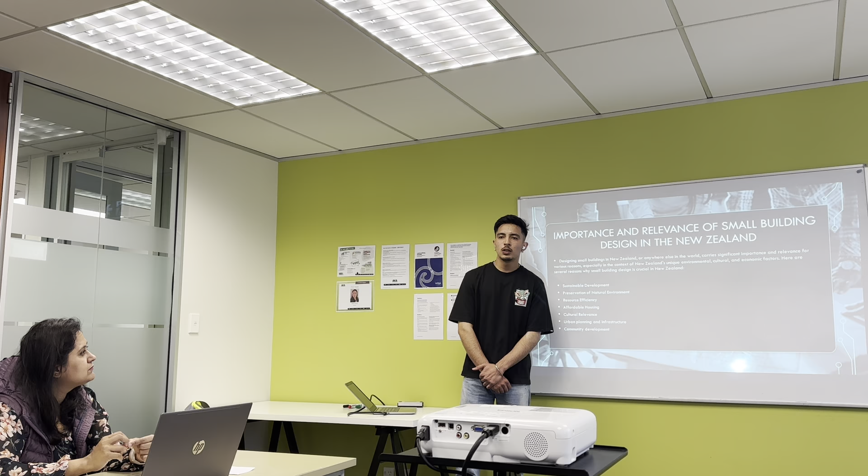Here are some important factors in small building design and why it's important in New Zealand, like sustainable development. Sustainable development is the process in which we don't compromise the needs of future generations, so we have to use resources very efficiently so future generations can also use the natural resources, and preservation of the natural environment. In New Zealand, timber is commonly used as a material for buildings since it is very common here.

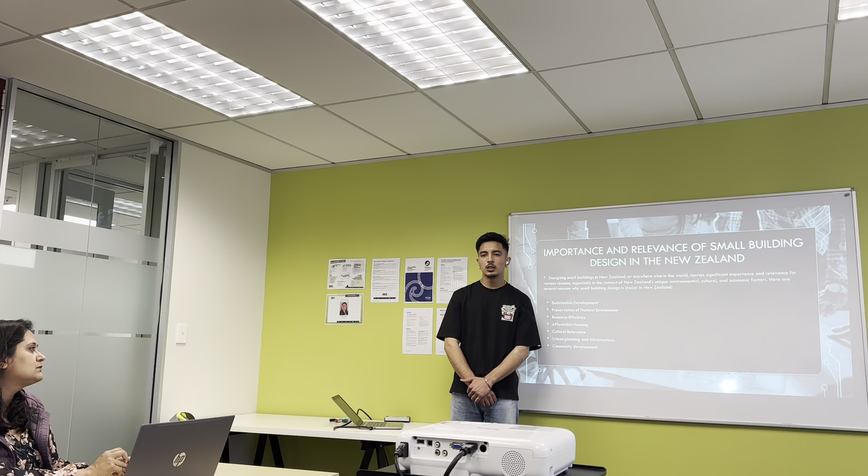This also has less carbon footprint on the environment, which is very important to have less impact on the environment. Resource efficiency, use of energy efficient materials in buildings like proper window openings and the use of natural sunlight, which helps to use less artificial energy and have less impact on the environment.

Small buildings are also very affordable in the New Zealand construction industry as it is commonly made from timber which is commonly available. Another point is cultural relevance, urban planning and infrastructure, and community development.

Importance of functionality in small buildings, like optimizing space and layout for efficient use. It includes maximum utilization since small buildings are very small in size, so use of each and every corner in the small building is very crucial. Improved control, as small buildings are smaller in size, so proper placement of furniture and appliances is very important for the easement of the inhabitants using the building.

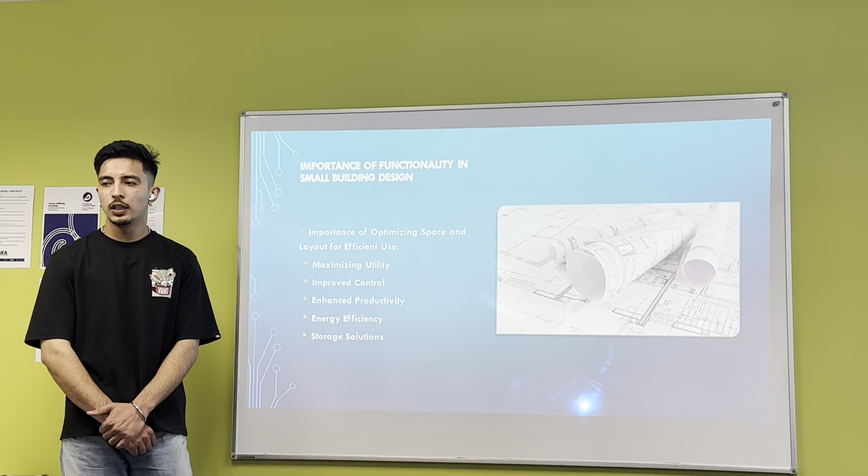Enhanced productivity, like in office layouts. In offices, enhanced layouts are very crucial, like proper layouts and meeting room areas, which are very important for effective workflow.

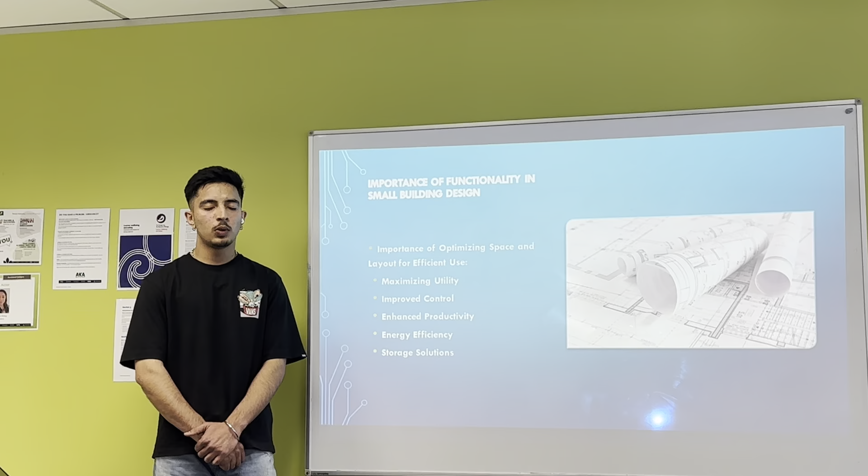Energy efficiency: use of energy efficient materials, proper use of window openings and ventilation. Then storage solutions: in smaller buildings, use of each and every corner is very important, since small buildings are smaller in size, so proper use of each and every corner in the building is important for effective storage utilization.

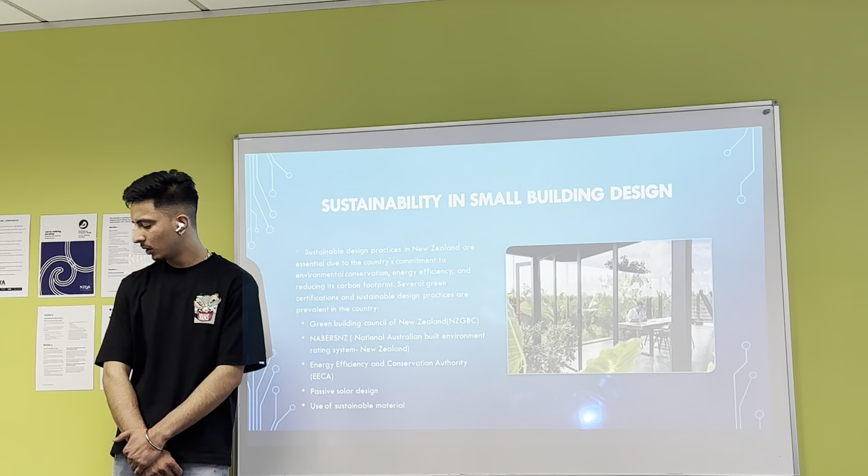Sustainability in small building design. Sustainable design practices in New Zealand are essential due to the country's commitment to environmental conservation, water efficiency, energy efficiency, and reducing its carbon footprint.

Several green certifications and sustainable design practices are used in the country, like the Green Building Council of New Zealand. This includes home rating tools like Green Star rating or Home Star ratings, which provide certification to buildings that they are meeting NZ standards or quality requirements.

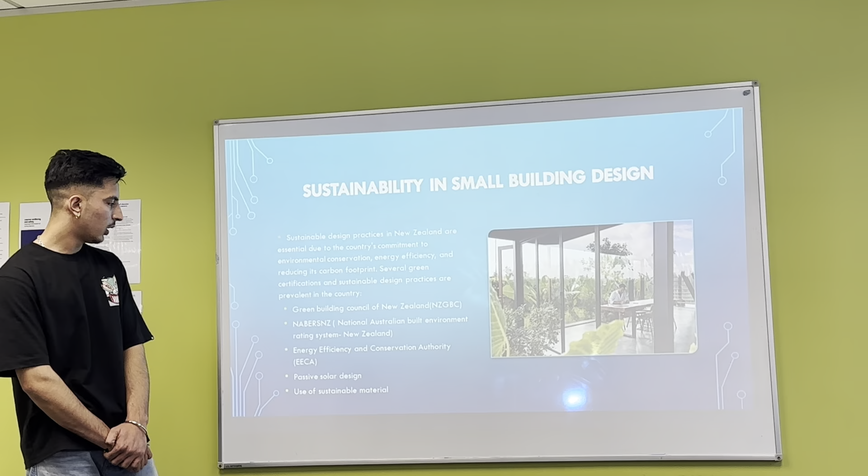Other factors include the National Australian Built Environment Rating System in New Zealand, the Energy Efficiency and Conservation Authority, passive solar design, and use of sustainable materials.

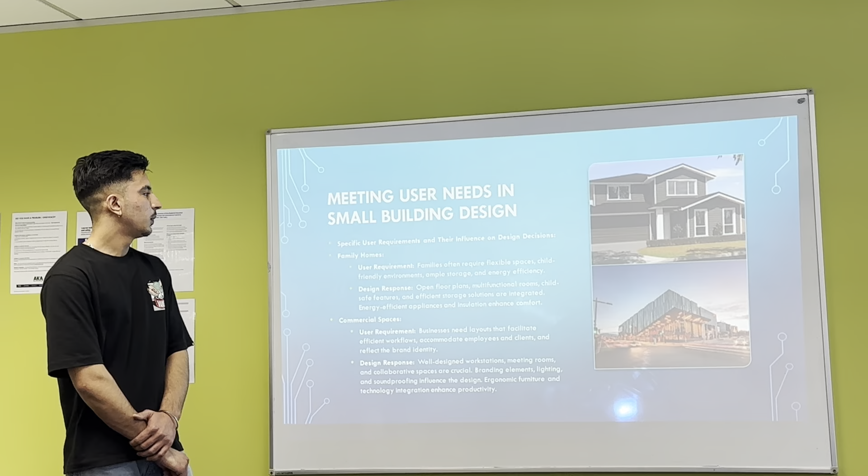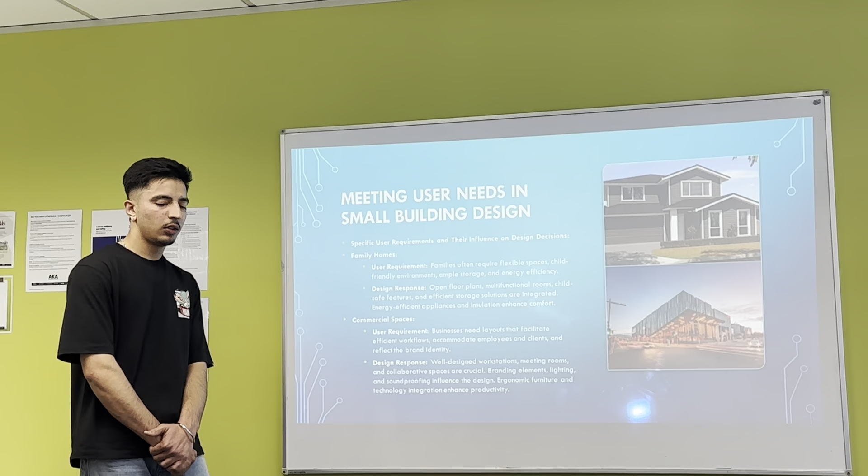Meeting user needs in small building design: specific user requirements and their influence on the design. In family homes, there are user requirements like flexible space, child-friendly environments, ample storage, and energy efficiency.

In the design factors, we mainly focus on multifunctional rooms, child-safe features, efficient storage solutions, energy efficient appliances, and insulation that enhances comfort. In commercial spaces, there will be requirements like layouts that facilitate efficient workflows, accommodate employees and clients, and reflect the brand identity.

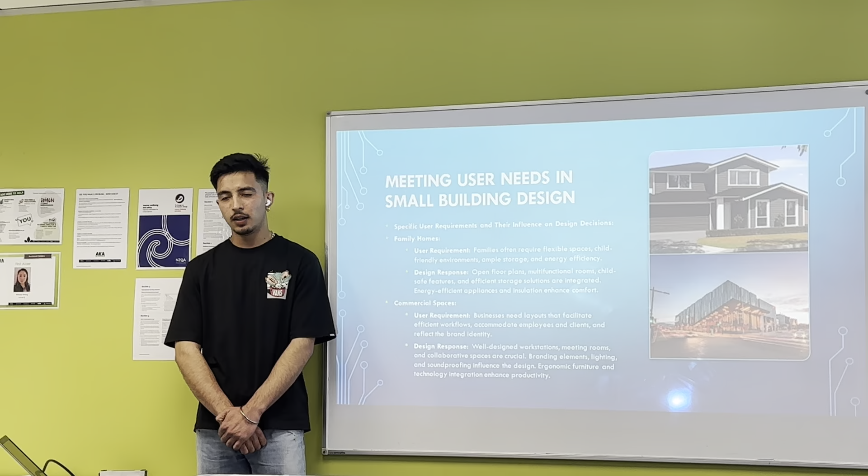Design responses include meeting rooms and collaborative spaces which are crucial, branding elements, lighting and soundproofing that influence the design, and ergonomic furniture and technology integration that enhances productivity in commercial spaces.

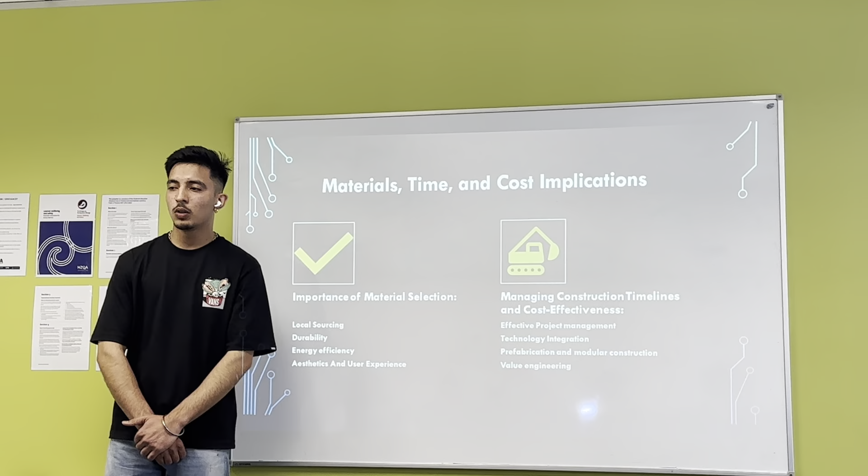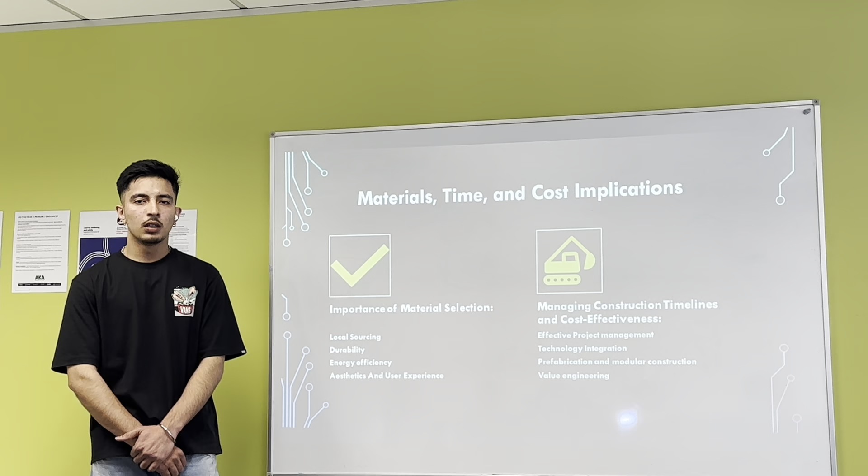Importance of material selection: material selection is very crucial in the construction industry, and there are some important factors we have to concentrate on, like local sourcing. Availability of locally available material is very important, which helps save time in the construction project, reduce delays since material is locally available, and can help increase construction process efficiency and durability.

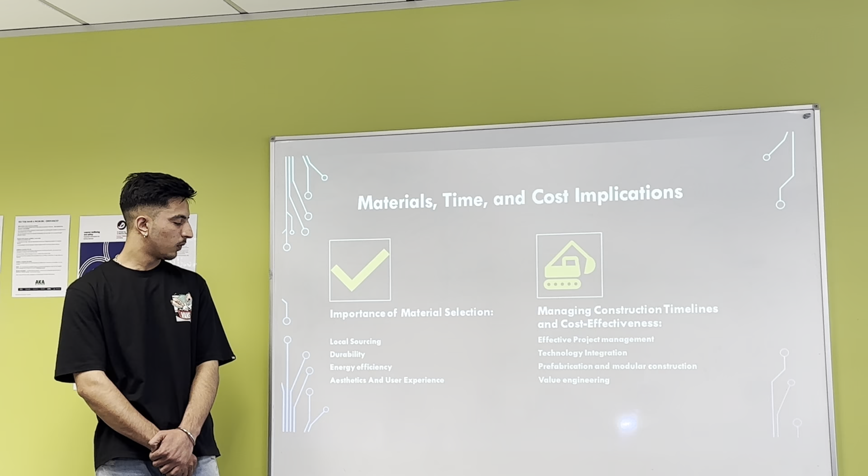Durable materials like timber and concrete are very important factors which we have to use in smaller buildings. Energy efficiency and the use of energy efficient materials which have less impact on the environment, like timber, are also key.

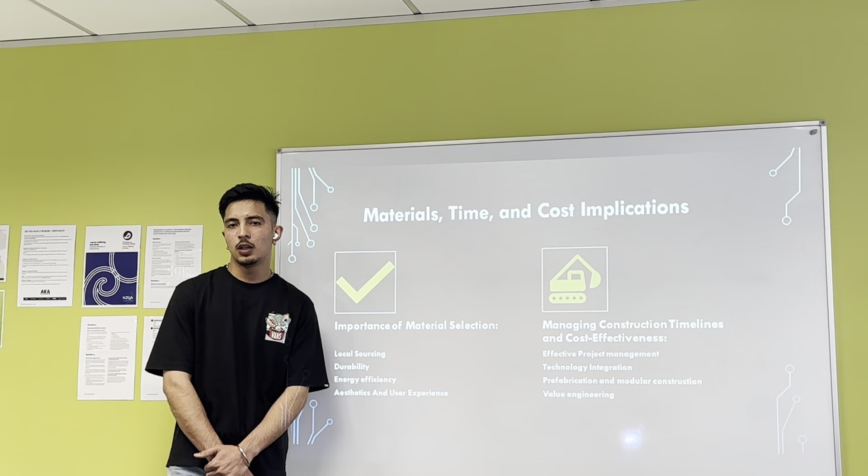Aesthetics and user experience are also very important, because everyone wants his house to look good from the outside, as it plays an important role in small buildings. Managing construction timelines and cost effectiveness, like effective project management, is also very important.

How the project is going on, technology integration mainly focuses on the availability of machines, so that project work does not stop during the process. Prefabrication and modular constructions, and value engineering, are other important factors.

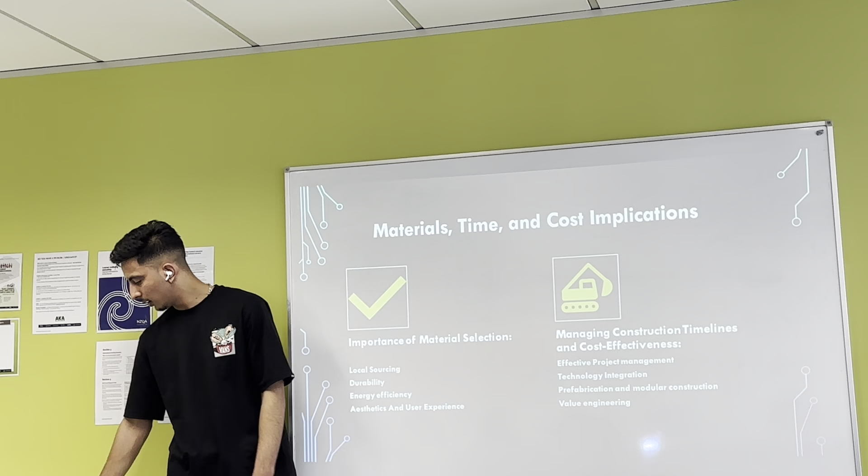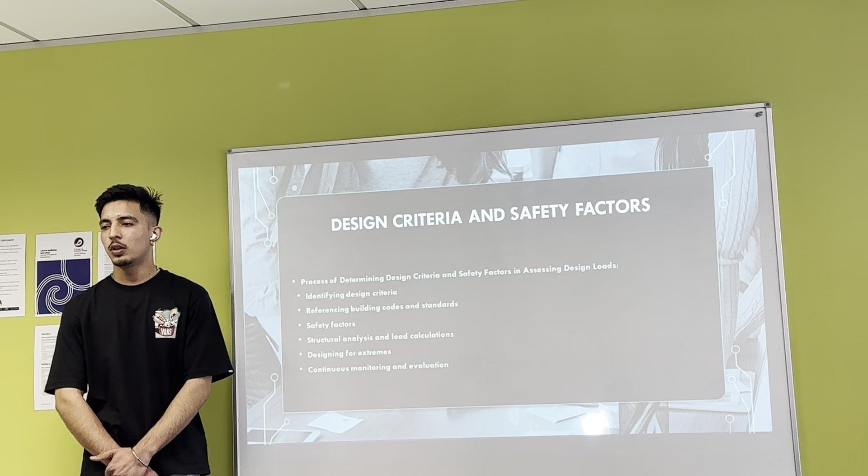Design criteria and safety factors involve determining design criteria and safety factors in assessing design loads. First, identifying design criteria is very important, as is design selection, which we use for small commercial and residential houses, referencing building codes and standards.

Every building in New Zealand must follow the NZ standards, which is very important for compliance with the standards. Safety of the occupants is also a very important factor.

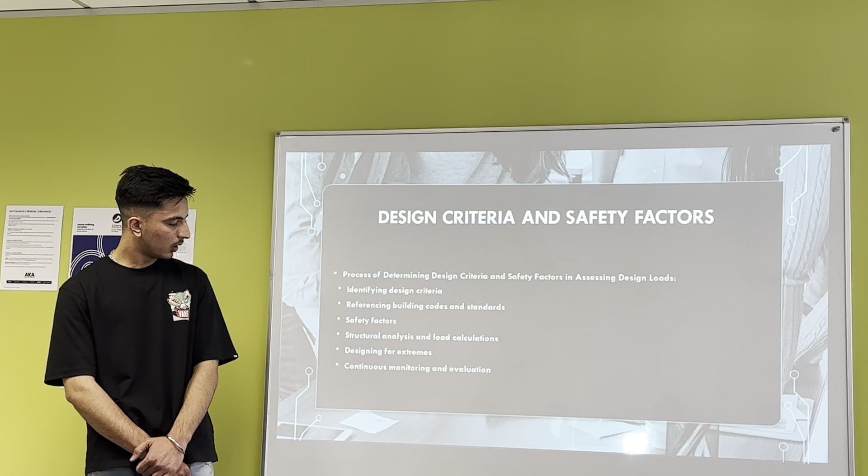Structural analysis and load calculations are important; in New Zealand, seismic load is one of the most important loads. Designing for extremes requires continuous monitoring and evaluation.

Key structural elements include foundations and their structural requirements. Essential structural elements in small buildings are beams and columns, as they transfer load equally to the foundation, along with roofs, roof trusses and roof materials.

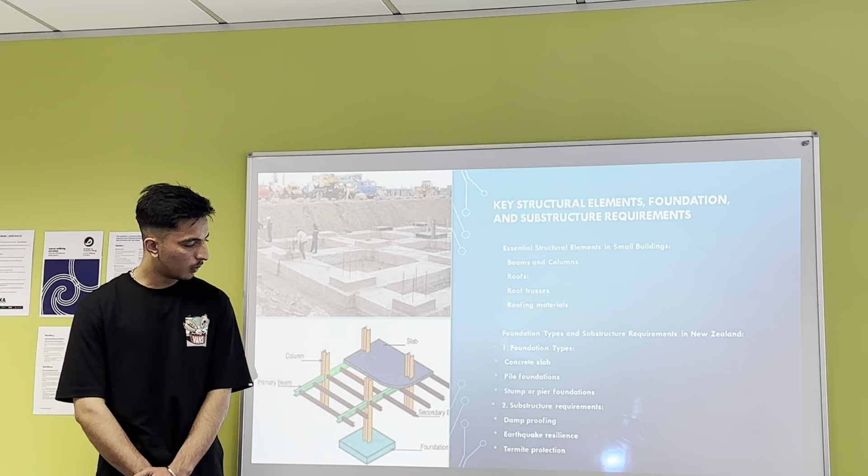Foundation types include concrete slab, pile foundation, and stump or pier foundations. In substructure requirements, there will be damp proofing, earthquake resilience, and termite protection.

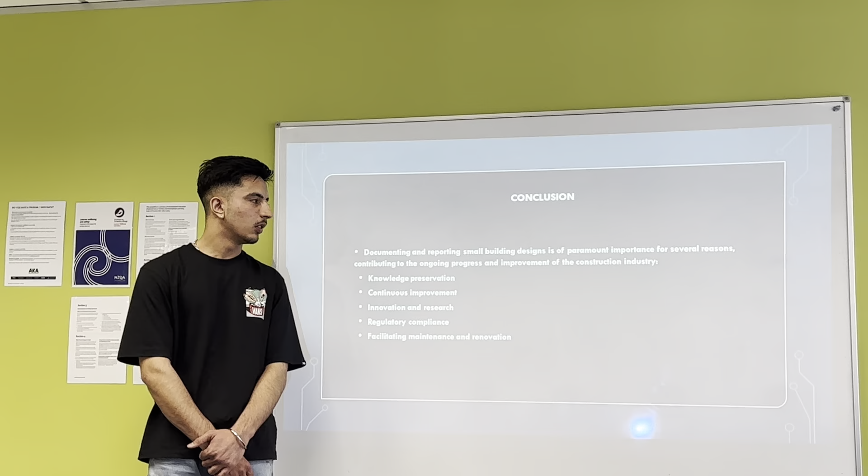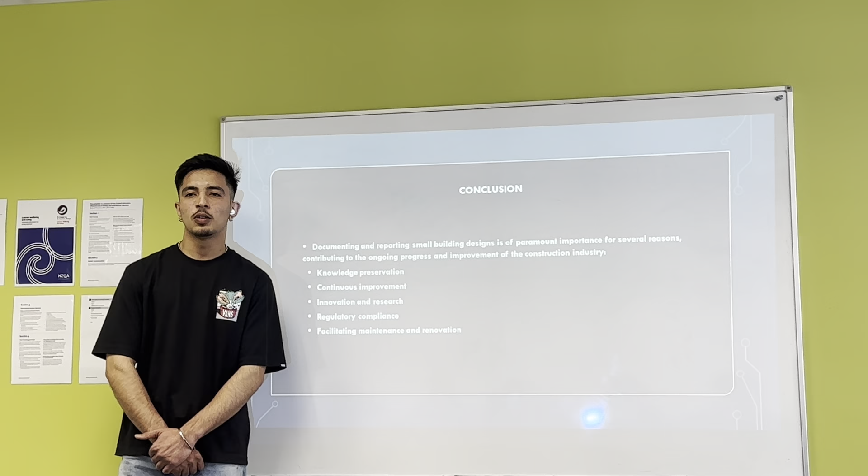Documenting and reporting small building designs is of paramount importance for several reasons, contributing to the ongoing progress and improvement of the construction industry: knowledge preservation, continuous improvement, innovation and research, regulatory compliance, and facilitating maintenance and renovations. By using knowledge preservation and considering past projects, we can focus on future ideas, particularly mistakes made in the past, and mitigate those problems in the future.